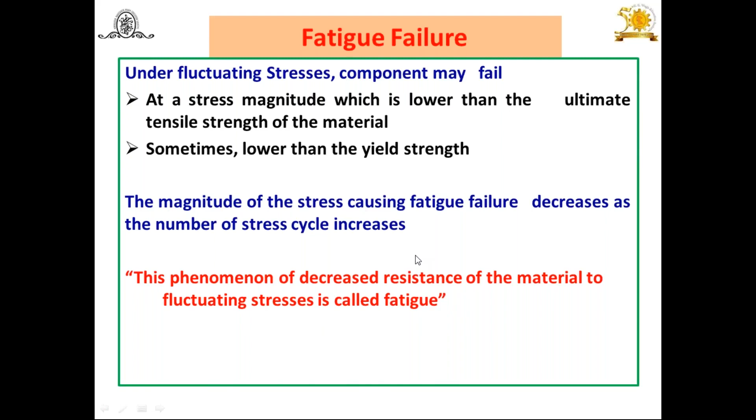The phenomenon of decreased resistance of the material to fluctuating stresses, or you can say the dynamic or fluctuating load, is called fatigue. Yesterday I have explained these things. This is about the fatigue or fatigue failure. Then endurance limit. What do you mean by endurance limit? I have already explained when components are subjected to fluctuating load, endurance limit or endurance strength is the criteria. But what do you mean by endurance strength?

Because you know very well, I have explained in fatigue failure how the component is going to fail. First of all, because of the abrupt change in geometry, somewhere the cracks or the holes or the slots or the cleavage, or there may be any material defect also. Because of that, the crack propagates from inside, and when it reaches the outer surface, the actual failure of the component happens. There is no alarm, and it is happening like the brittle failure of the material. And that's why while defining the endurance limit, we have to take care of these things.

The endurance limit means the maximum amplitude of completely reversed stress that the standard specimen, here the word standard is used, can sustain for an unlimited number of cycles without fatigue failure. Without fatigue failure means before the crack propagates from inside and reaches the outer surface. So without fatigue failure, that is endurance limit. That means the component can sustain many number of cycles without fatigue failure when subjected to dynamic load. In other way, you can say it's the endurance limit.

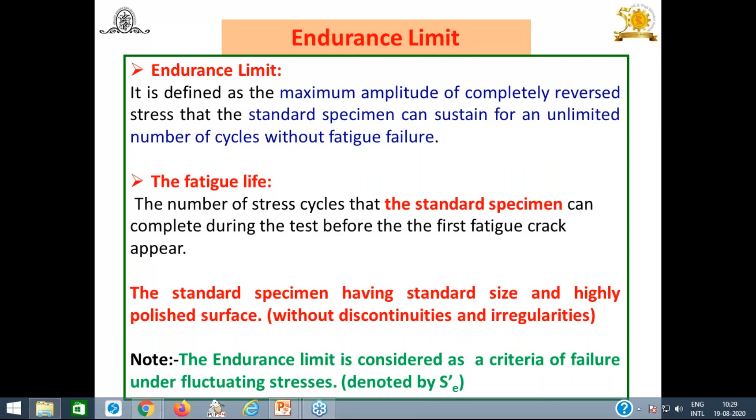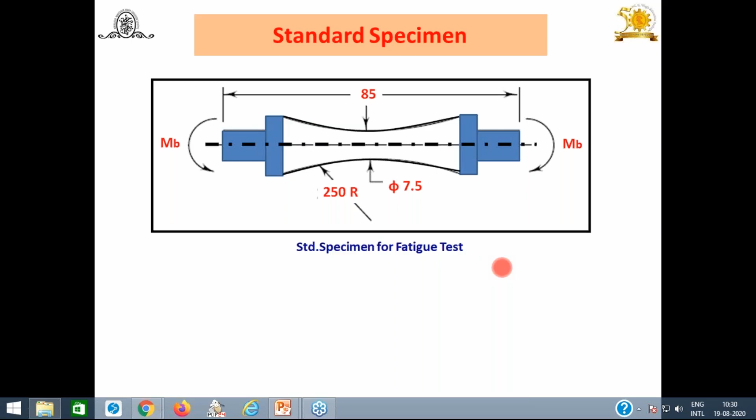This is the standard specimen generally used in the laboratory to find out the endurance limit of the material or component, or to find out the fatigue life of the component. It's a standard specimen used by R.R. Moore for finding the endurance limit and the fatigue life of the component. This is the specimen. I will explain how to determine the endurance limit in the laboratory.

Before that, we should know that the endurance limit or endurance strength depends on a number of factors. The first one is number of cycles, meaning how many cycles the component or material can sustain before the first fatigue crack appears, or in general, before fatigue failure. Second, mean stress value. Yesterday I explained the sinusoidal curves and different models for different loading conditions. Mean stress also plays an important role. Then stress amplitude sigma A is also important.

Then stress concentration. Why stress concentration? There is an abrupt change in geometry, so stress concentration plays an important role. Because of that, there are more chances of fatigue failure occurring in the material or elements. Then residual stresses are another important thing.

You know very well, I have explained residual stresses and how to reduce them. Sometimes residual stresses have an advantage, sometimes a disadvantage. They are a sort of compressive stresses. I already explained during unit number 1 the different types of stresses induced in the component, during bearing pressure and crushing stress. Then corrosion is another aspect of fatigue failure. Sometimes a component may fail because of it.

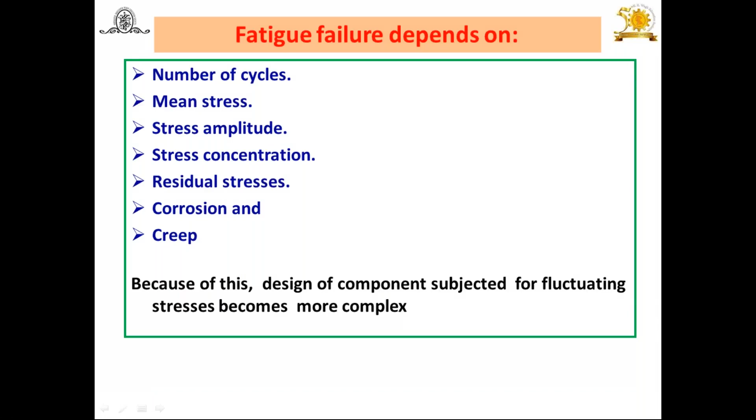These are the parameters on which the endurance limit of the material or the component depends. And how to determine the endurance limit in the laboratory? For that purpose, you might have studied this part also in material science or metallurgy: the rotating beam machine developed by R.R. Moore. This rotating beam machine is used to determine the endurance limit in the laboratory.

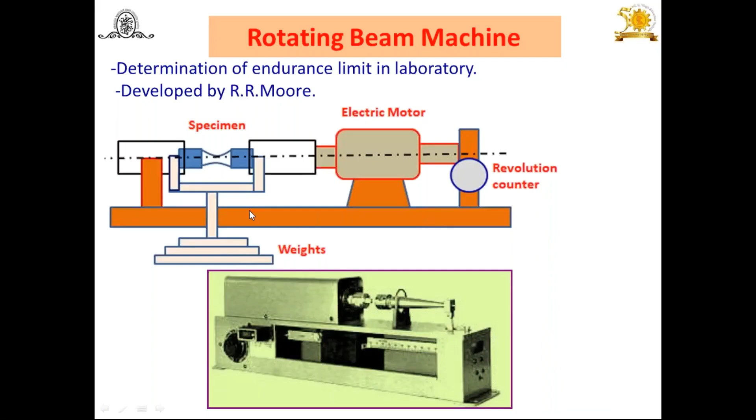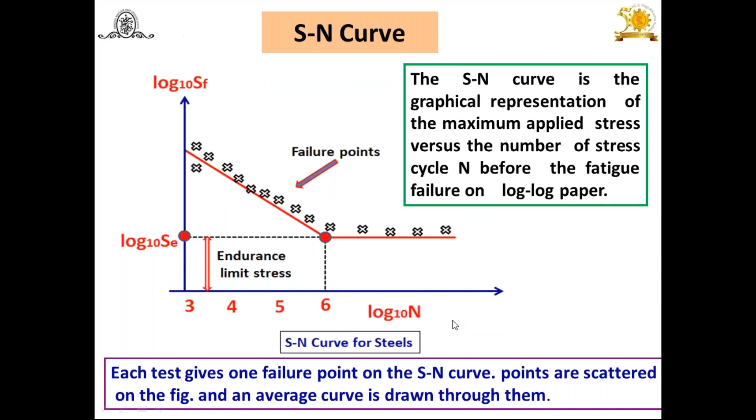This is about the SN curve for a steel material. For a steel material, it becomes constant at 10 raised to 6, and you can locate your endurance limit. Now look at this. Again, I would like to show it for a non-ferrous material here. This is also for a steel material.

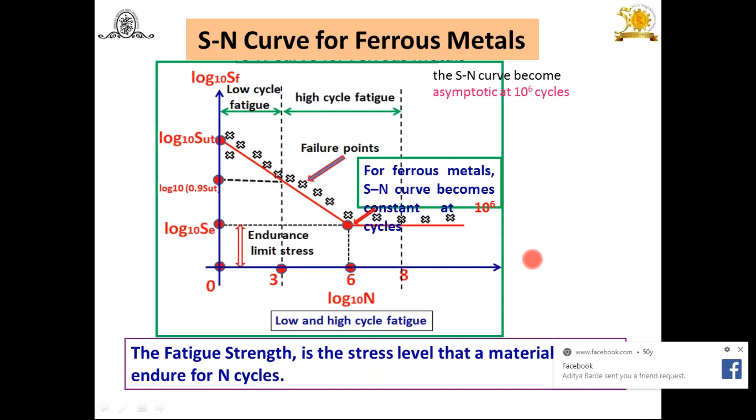So these two terms, I will explain here also, why these terms are important on the SN curve. Look at this. Now here is the interesting thing, please give attention. For a ferrous material, I have shown the SN curve, and this curve becomes asymptotic at 10 raised to 6 cycles, meaning constant. After that, you will find it remains constant up to an infinite number of cycles. Even if you go to 10 raised to 8 or 10 raised to 9, it remains constant. And it's denoted by SE at 10 raised to 6. That I have already discussed with you.

The SN curve is also called the Wohler curve. Wohler was a German researcher who first published the literature on fatigue failure associated with the SN curve. That's why the SN curve is also known as the Wohler diagram. Then the third point, low cycle fatigue. What do you mean by low cycle? Any fatigue failure when the number of cycles is less than 1000 is low cycle fatigue. The fatigue failure may occur before 1000, or 10 raised to 3, cycles, and that is known as low cycle fatigue.

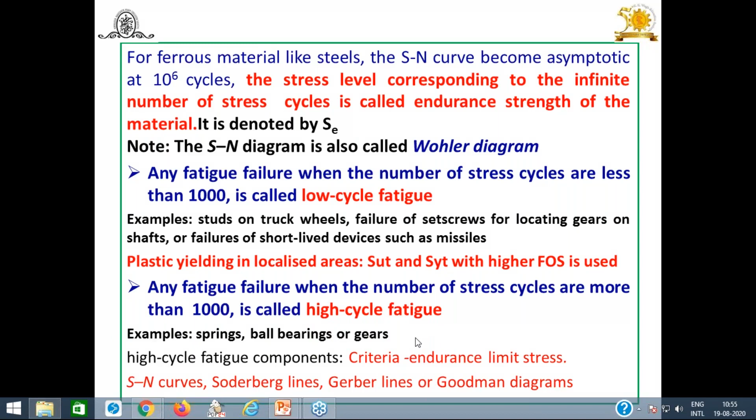But for non-ferrous material, such as aluminum alloy, there is no Fe content. So you will find at 10 raised to 6 cycles, even when it is subjected to stress, the graph slopes gradually down after 10 raised to 6 also. So what is the difference between ferrous and non-ferrous? For ferrous, it becomes constant here. For non-ferrous, the SN curve continuously slopes gradually down even after 10 raised to 6 cycles.

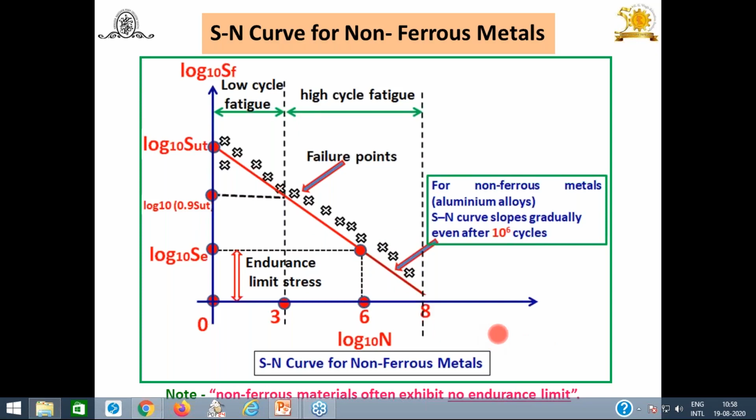While solving problems, you will always find SN curves for ferrous materials or steels are given, generally not for non-ferrous materials. Because it exhibits no endurance limit, the question arises where to locate, at 10 raised to 6, 7, 9, and it is going to change, or past experiments or the design will decide.

And for that purpose, how to decide it? If it doesn't exhibit an endurance limit, sometimes the endurance limit is expressed as a function of number of stress cycles, as I have already told. So after 10 raised to 6 you can also look at 10 raised to 7, 10 raised to 8, as a function of stress cycles. In this way you can locate that point for the endurance limit.

Again, for gears, for shafts, or other components, medium carbon steels or plain carbon steels are generally preferred. That's why we are using this SN curve diagram. You will find it is going to decrease, and at 10 raised to 6 it becomes constant for medium carbon steel.

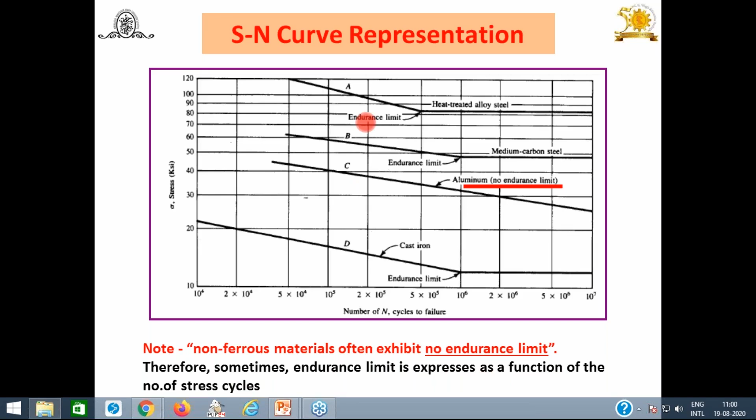Again, aluminum or aluminum alloy is a non-ferrous material. There is no endurance limit. Look at this, it goes continuously down with a gradual slope. So we can't locate it. That's why I have mentioned here there is no endurance limit. But to find it, sometimes we can express it as a function of number of stress cycles. Try to understand. This is about the SN curve, and we are going to use this.